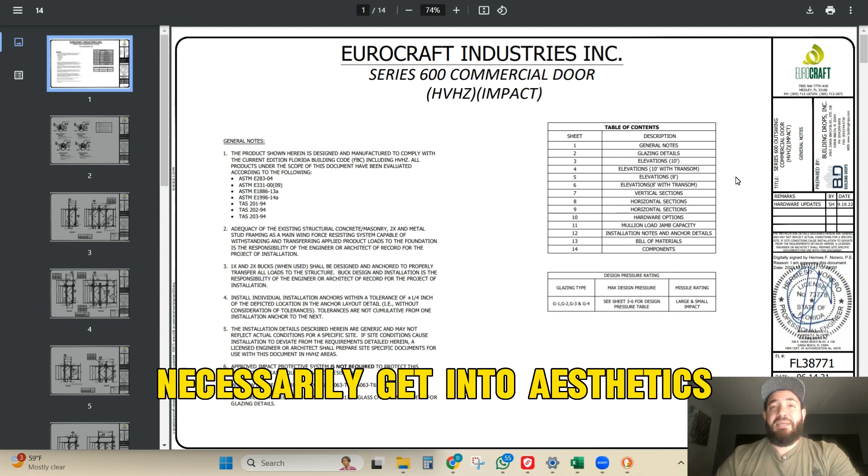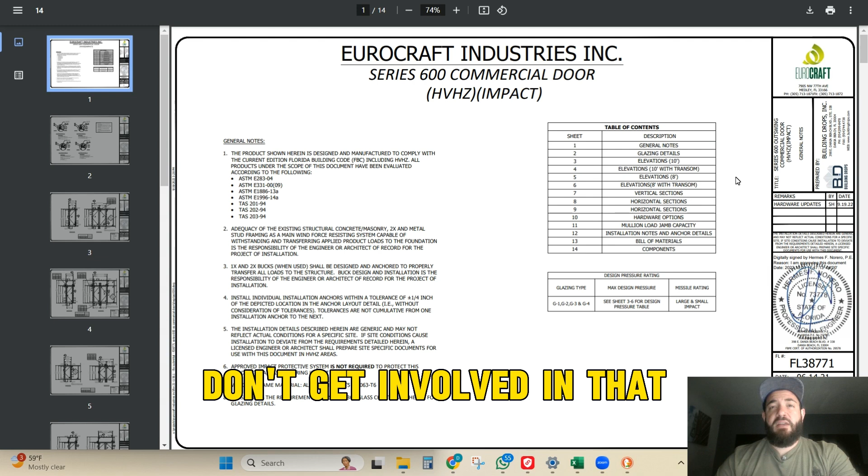Like if you don't like the way that a caulking job was done, or if you have a stucco repair that was done and it's unsightly, typically the inspectors don't get involved in that. What they're looking for is building code. Is your home going to be safe?

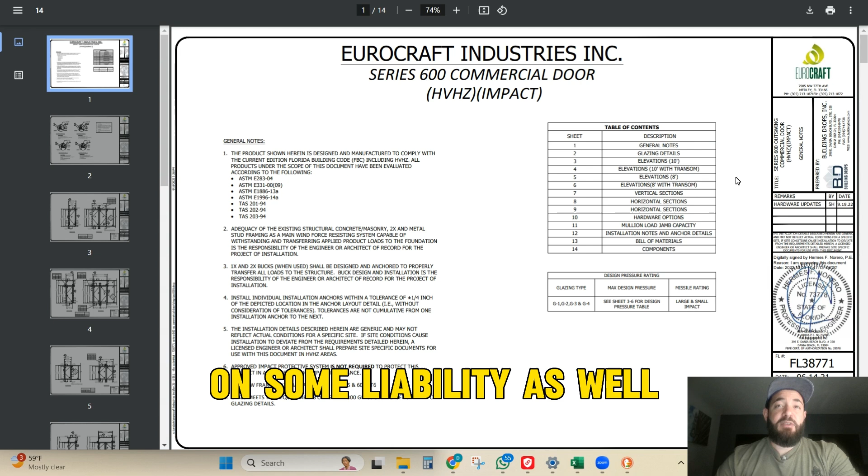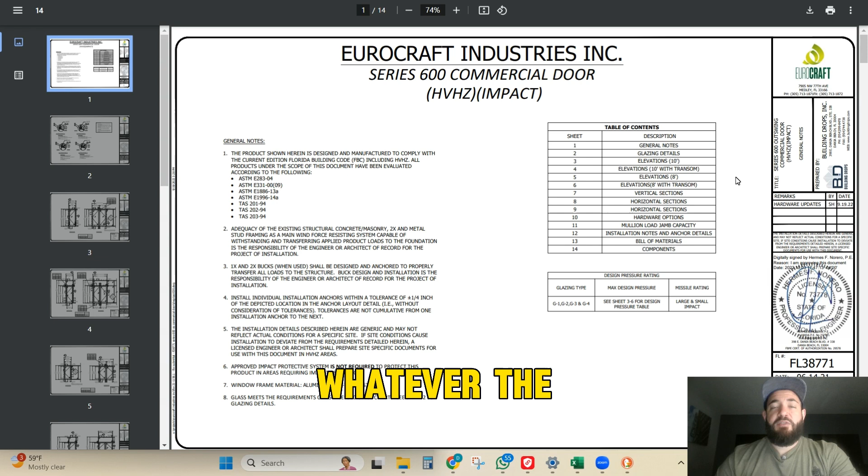Because a lot of people don't know this, when the inspectors sign off, they are actually taking on some liability as well, saying that they inspected and approved the installation of whatever product it may be, whether it's flooring, your framing, your foundation, whatever the inspection may be, but we'll keep it specific to windows.

So here, what I want to talk about is the NOAs and how to understand some basics on here. And if you have any specific questions, you can always reach out to us. We're happy to help. Even if you went with somebody else, we're still here to help you make things right.

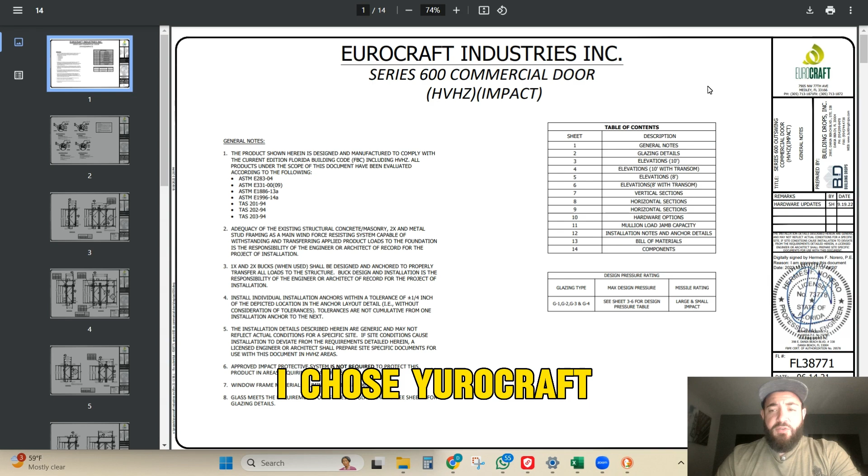So this is our cover page. I chose Eurocraft just because they were the first ones that popped up in my search on my computer. So this is kind of like an introduction.

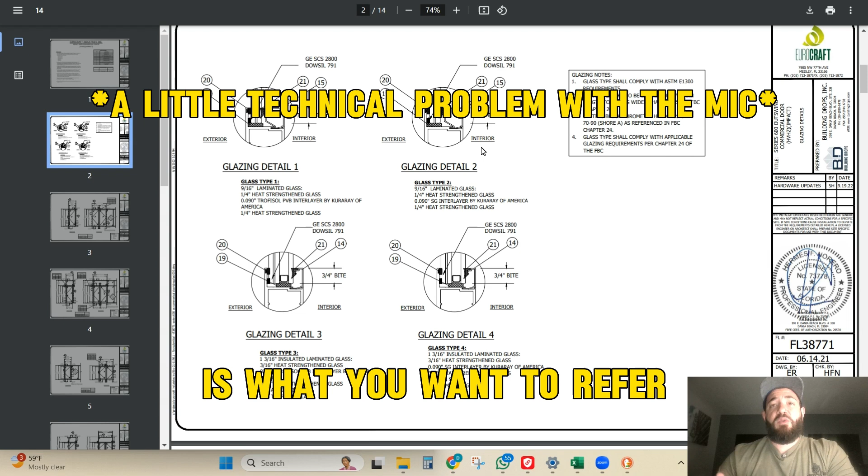It talks about different glazing details, like how the windows are made. The difference between NOAs and a Florida product approval is NOAs is a notice of acceptance, and that's what is approved by the county, being in a high velocity hurricane zone where standards are going to be a little bit higher. We also have Florida product approval codes, which are products approved in the state of Florida, which will typically have very strong standards as well.

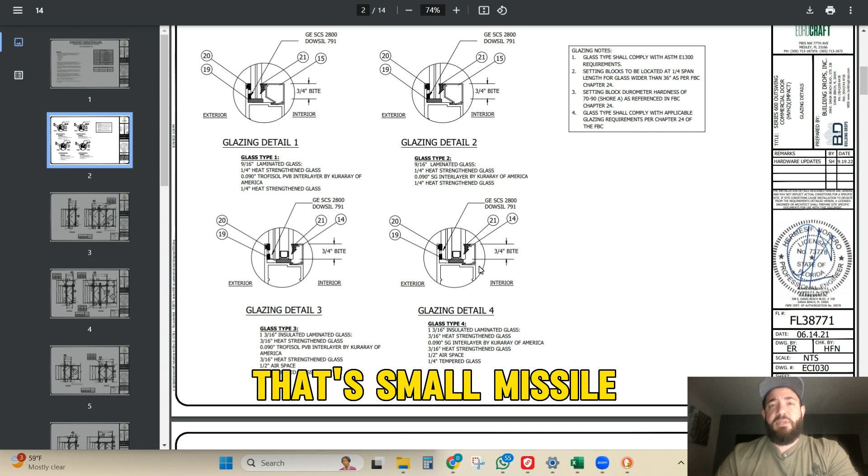So then getting into more details, you'll see SMIs and LMIs, that's small missile impacts and large missile impacts. We'll cover that in a different video. For now, we're just going to go over the basics and how to understand the NOA a little bit better if you have any concerns.

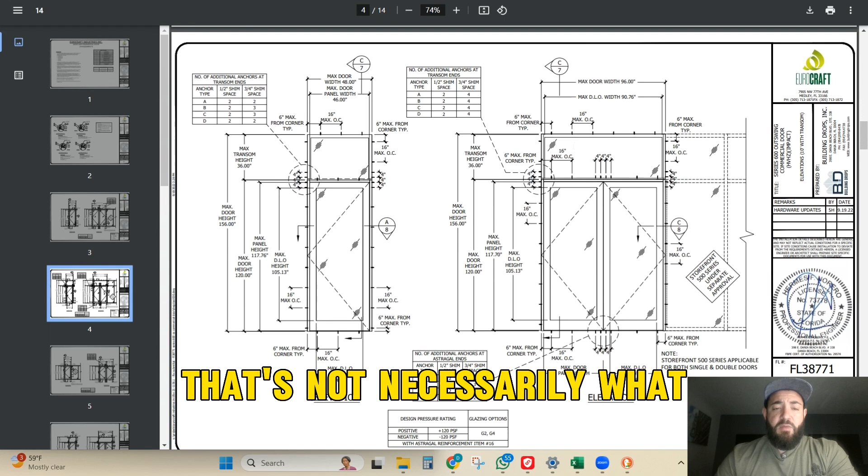So we get into glazing details. This basically talks about your maximum openings, shows you the elevations, talks about the product. That's not necessarily what I wanted to come in here for. We are going to get into screw spacing, maximum 16 inches on center. However, typically the manufacturer will already have those holes pre-drilled, making our job a little bit easier.

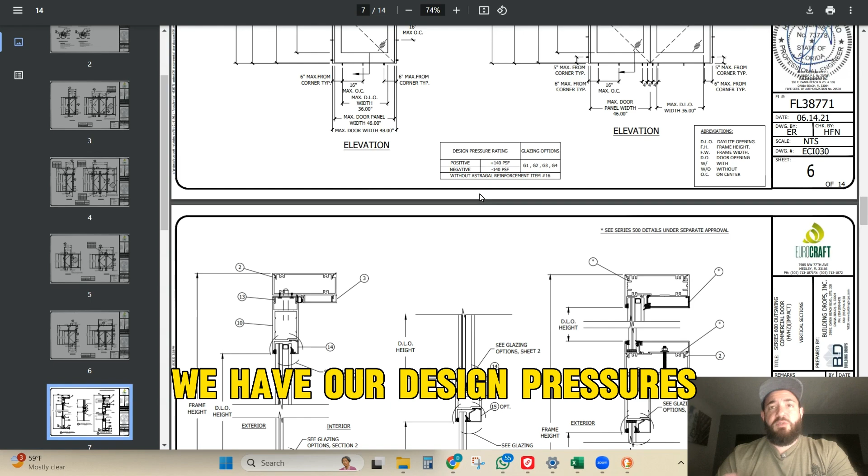And they don't want the first screw further than 6 inches from the corner. Just for example, we have our design pressures, which we'll get into in another video. What I want to talk about is more the installation here and what to look for.

So we have some different lock options, and these are all part of the approval process. This is a document that has been submitted, looked at, and approved, along with a lot of testing that went into the process of getting these windows or these storefront doors approved.

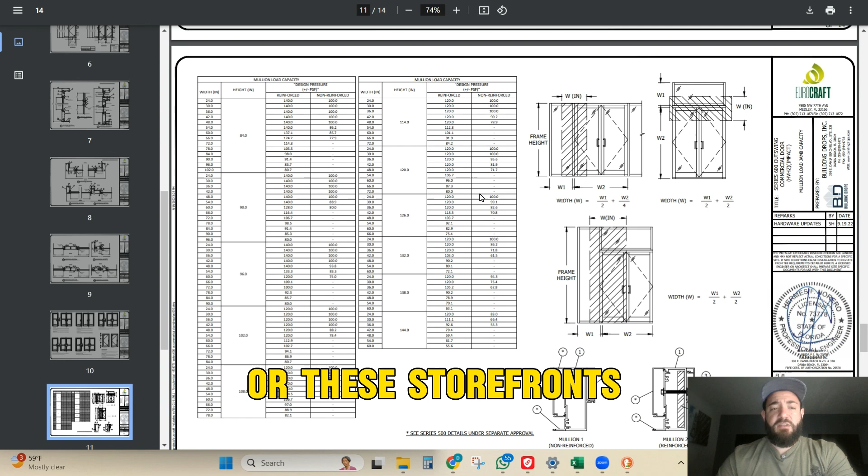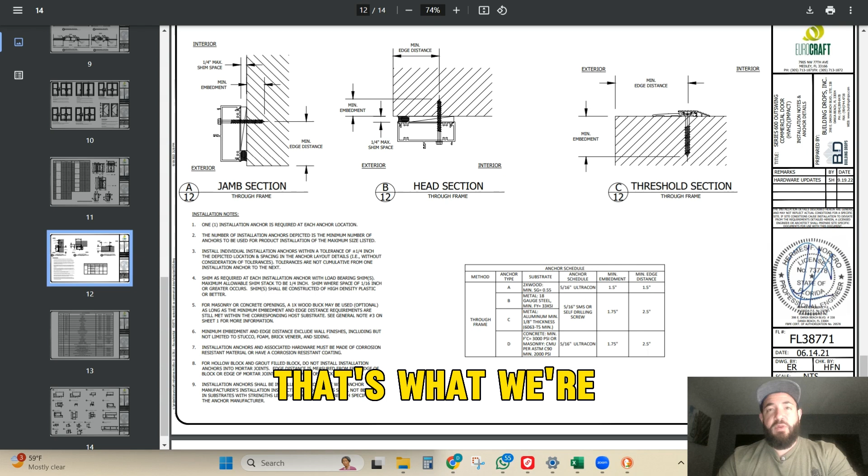So this page, which is 12 of 14, we get into the screws that go through the frame, what kind of anchor we have, the substrate we are going into, what kind of anchor we should be using, the minimum embedment, and the minimum edge distance, which is what I want to cover. That's what we're going to get into, because this, in my opinion, is the most important thing.

If your windows are not held properly by the screws, do you have an impact window or do you have a riot shield? It's very important.

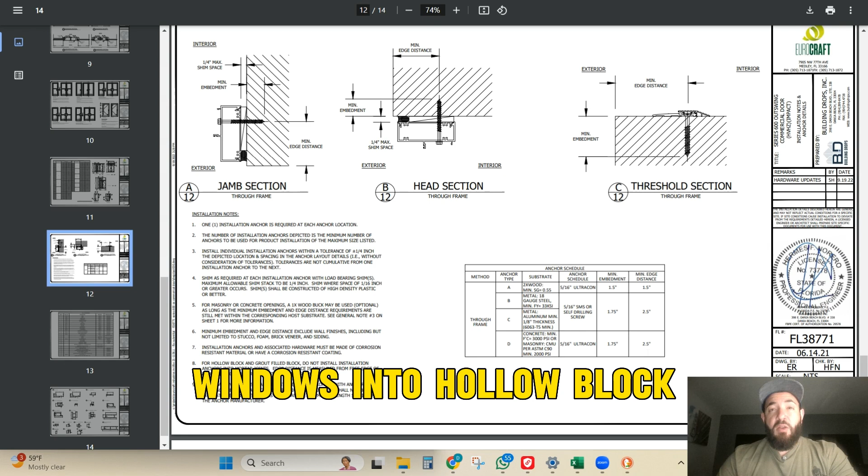I've unfortunately been called to jobs where they're missing screws. They installed the windows into hollow block where the screws are just hanging in the air. You can literally go and flick the screw or the anchor that's there. Just absolutely horrible things. Not that that happens all the time, but we do see this in rare circumstances.

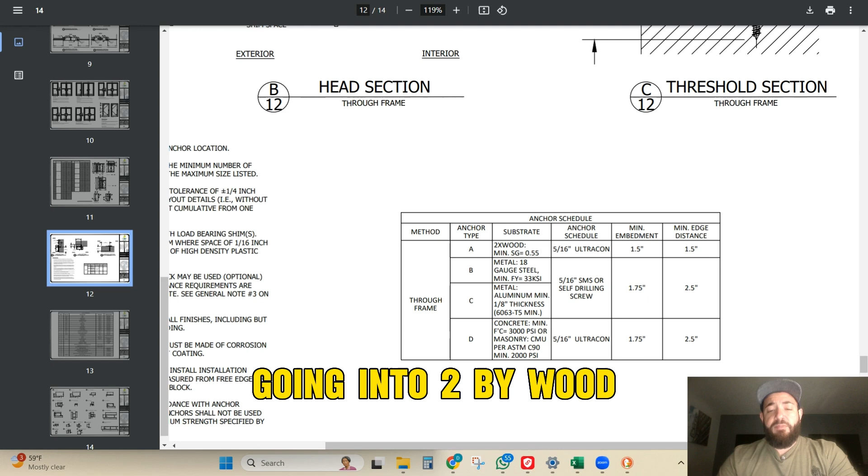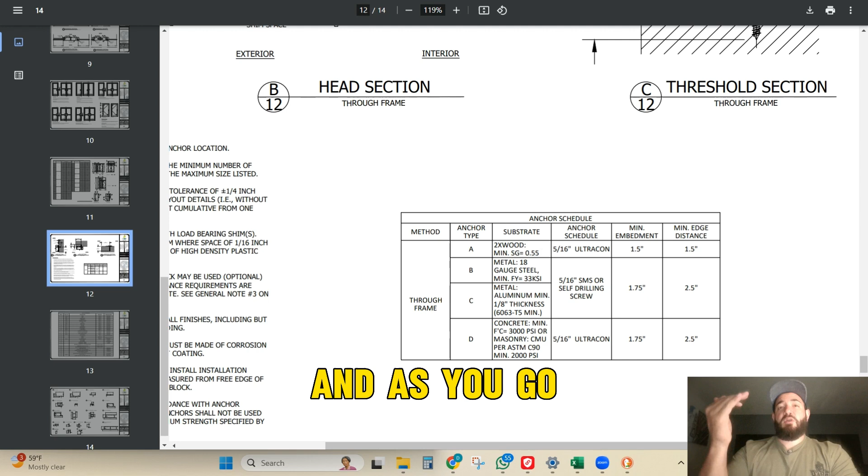So once again, this is what I want to cover and focus on. So when we're going into 2x wood, in South Florida you're going to see a lot more concrete construction. However, as we go up the coast, especially on the West Coast, we do see a lot more wood framed, and as you go up to North Florida, we do see a lot of wood frame houses. So we'll start with that.

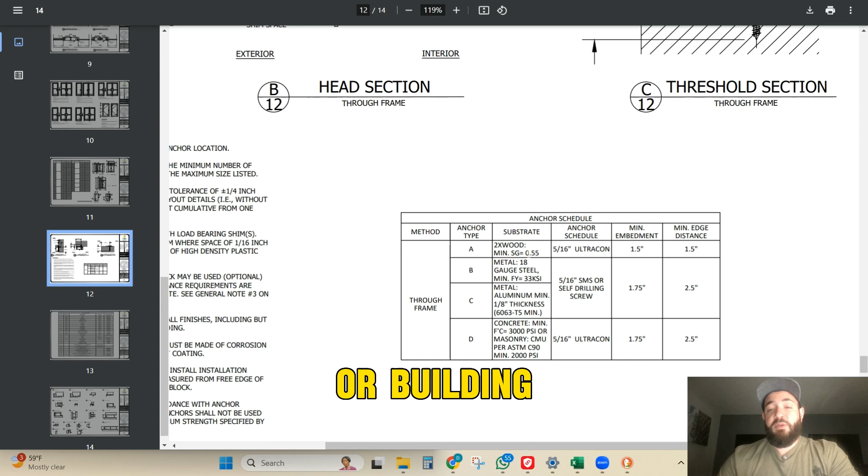So when you have a 2x wood, which could be a 2x4, 2x6, 2x8, just depending on the structure of the house or building, they want us to use a 5/16, that's the thickness of the screw. They want us to embed that screw at least 1.5 inches, and they want us to be 1.5 inches from the edge.

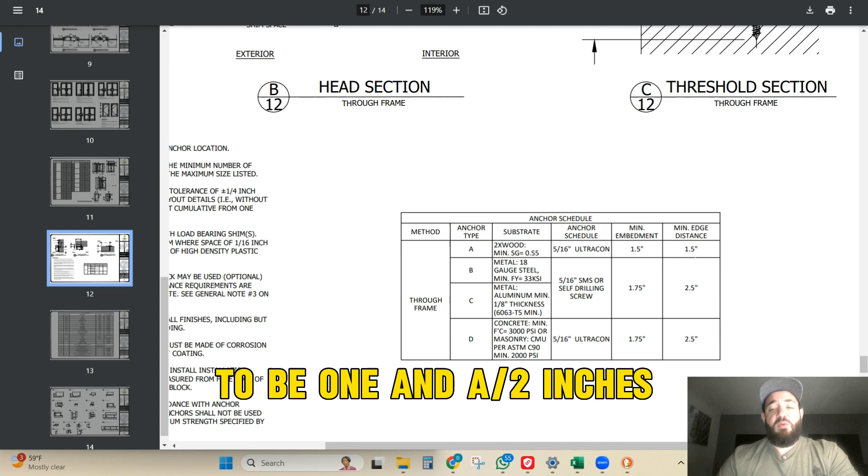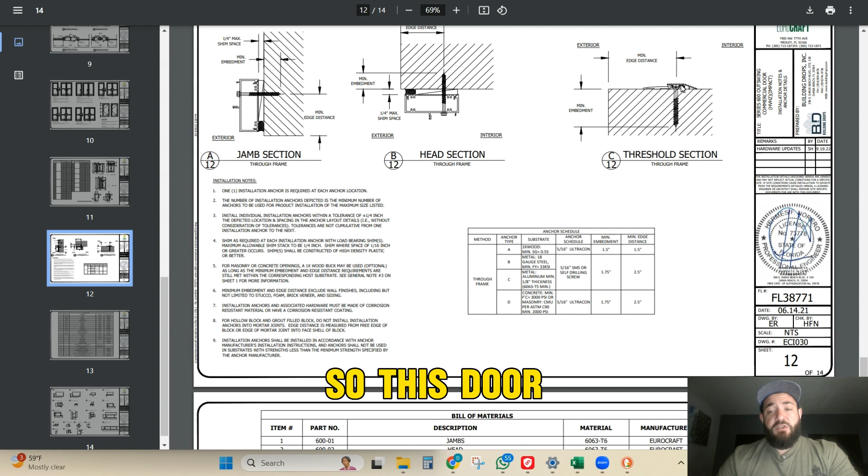And that's what I'm going to get into. So if this is our structure, or actually this would be the outside of the house, this would be the inside of the house, our screw has to be 1.5 inches, the center of this screw. So we have to have 1.5 inches minimum over here and 1.5 inches minimum over here. So this door can't be all the way towards the edge.

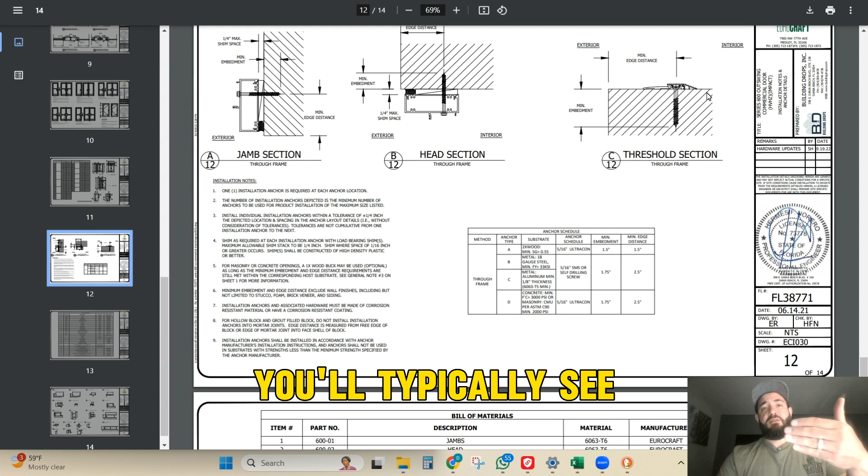So what you'll typically see, and the way that you can tell the difference between a wood frame structure and a block structure, is that the doors and the windows in a wood frame structure are typically flush with the front of the house, whereas when you have a concrete structure or a masonry opening, you'll typically see that the window's recessed. So if you have a wall that is a 2x4, your 2x4 is really 3.5 inches. So that screw has to be dead center on the 2x4 in order to make it.

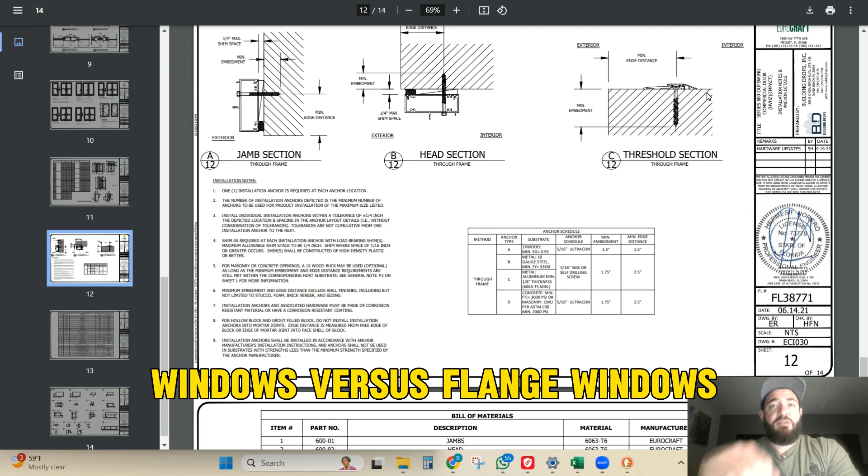There are other types of options, which we'll get into in another video, in regards to through-frame windows versus flange windows. That's a whole other subject. For now, we're just focused on through-frame windows, talking about different structures. So it's very important that that screw is pretty much dead center in the opening. And then also we want to have a minimum embedment of 1.5 inches.

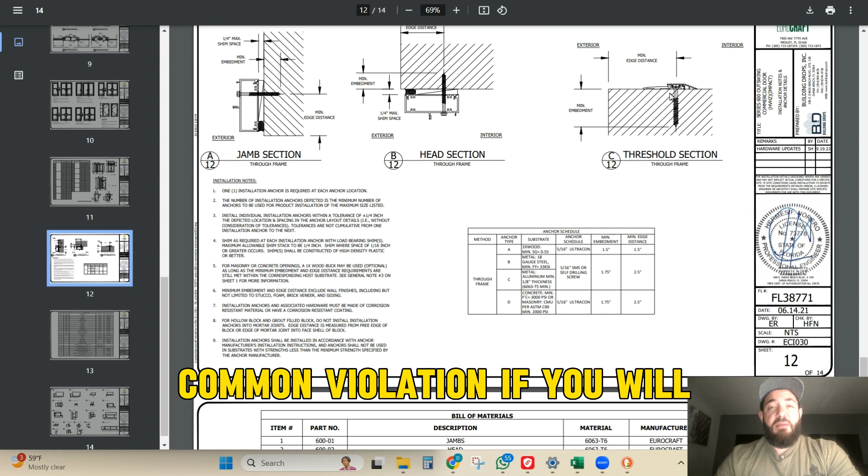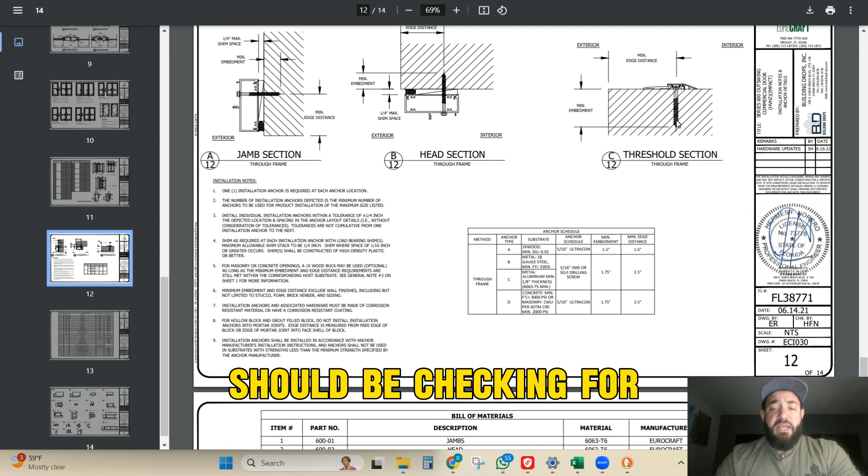So this is what we see a lot of, and this is our most common violation, if you will, or our most common mistake: the installers don't measure the windows properly and they end up with a very large gap in between the frame of the window and the wood or the concrete that they're screwing into. So this is usually filled with shims, or they'll put wood, things like that. But what the inspector should be checking for is that this part of the screw is actually embedded into the structure 1.5 inches.

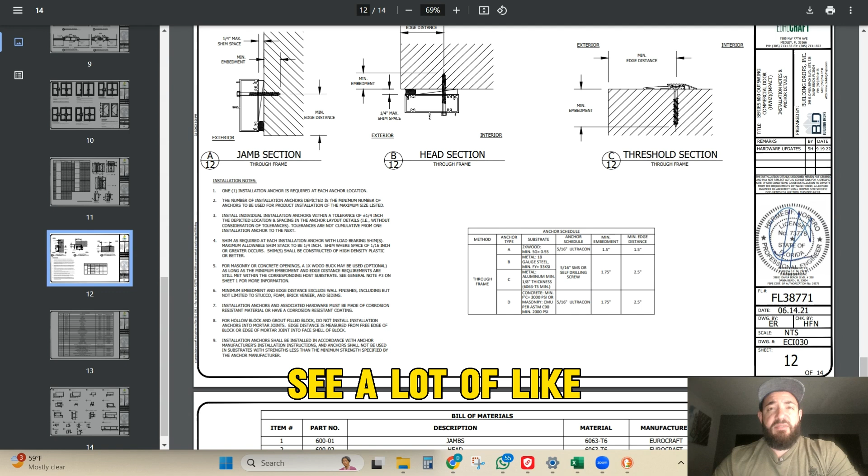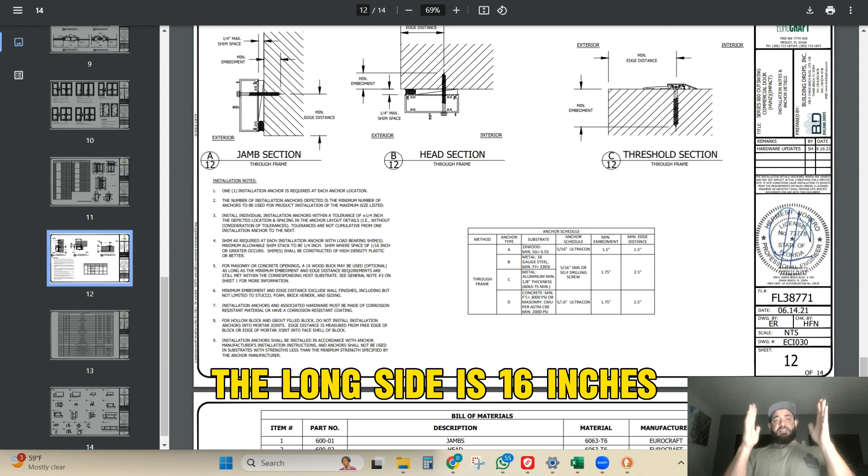And then when we have a concrete opening, our concrete blocks, the long side is 16 inches, they're 8 inches tall, and they're 8 inches deep. 16, 8, 8. Easy numbers to remember. So when we take that long block and we turn it sideways, we have 8 inches to install this window. There is a code that basically tells us that the window does have to be recessed a certain amount. Once again, those minimum edge distances will apply in this case as well.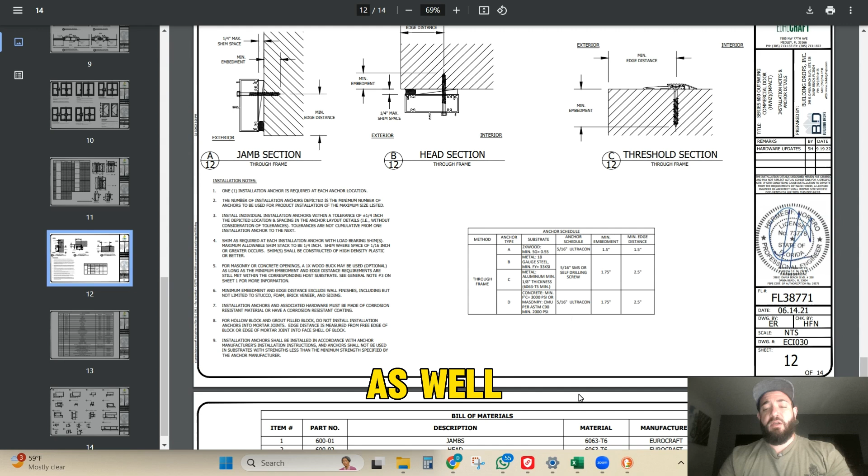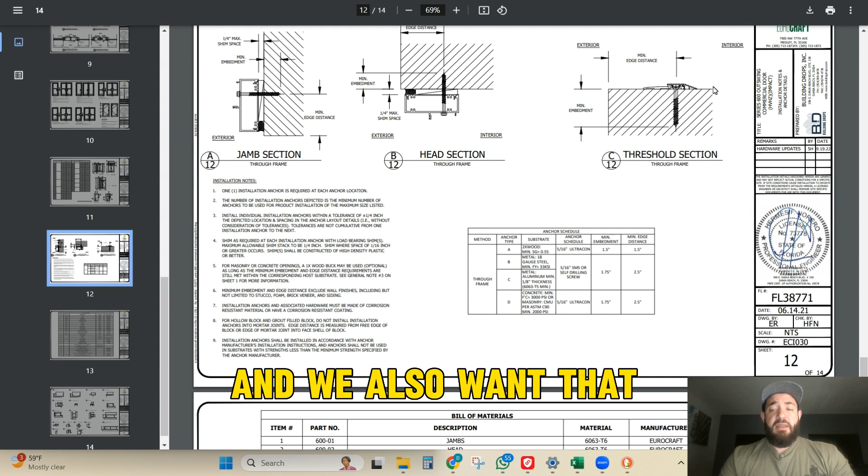So when you look down here, we're still using the same kind of anchor. The minimum embedment will actually be a little bit deeper, and our minimum edge distance is a little bit wider. So once again, coming here to the threshold, we want our screw to be a little bit deeper in the masonry or the concrete. And we also want that minimum edge distance from the inside or the outside, from the center of the screw, to be 2.5 inches in either direction.

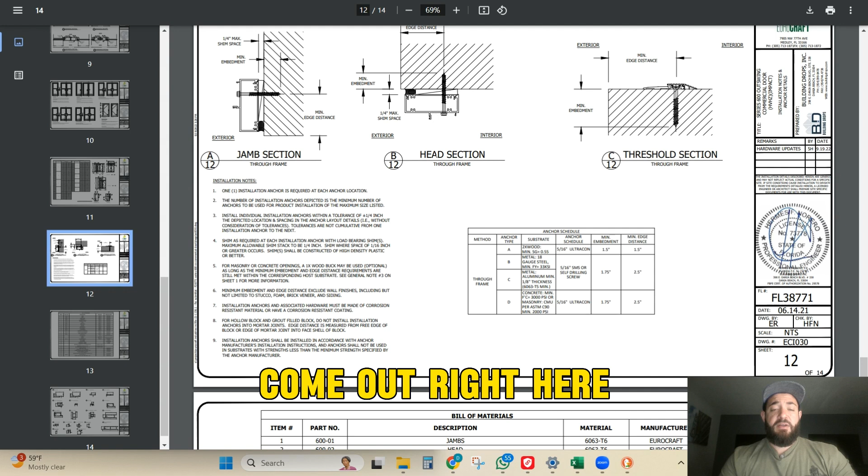My brother actually did a video fairly recently. So this is looking top down. Basically, if you cut above the window and you're looking at the wall here, your window would come out right here, and then you'd have another wall right here. You'd be looking at your sill from the top down, where this window was pushed all the way forward. Now here, it actually looks like the window is pushed forward, so this is not really the best depiction. However, the minimum edge distance is what we're after.

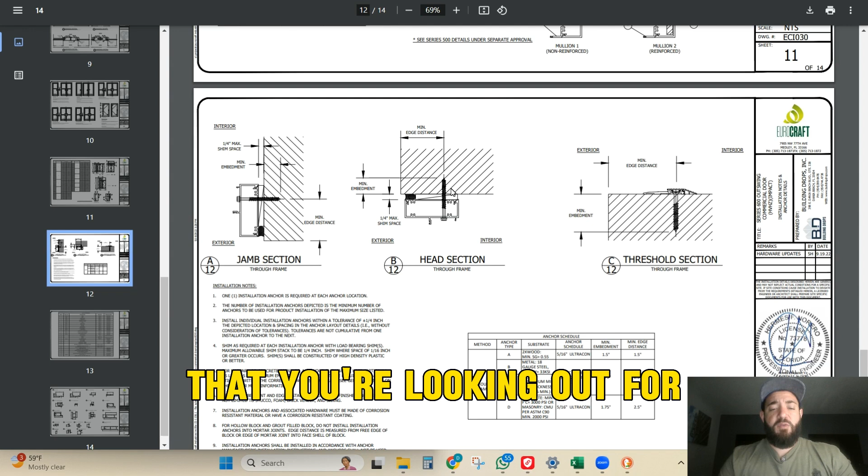So my advice to homeowners: the biggest thing you're looking out for is really the space here. And you can see this little rectangle here, that is a wood buck is what they are depicting. And that wood buck could be part of the consideration in regards to that minimum embedment. So 1.75 inches, say this wood buck is 1/2 inch or 3/4 of an inch. We would only need to go 1 inch into the masonry opening, which is here.